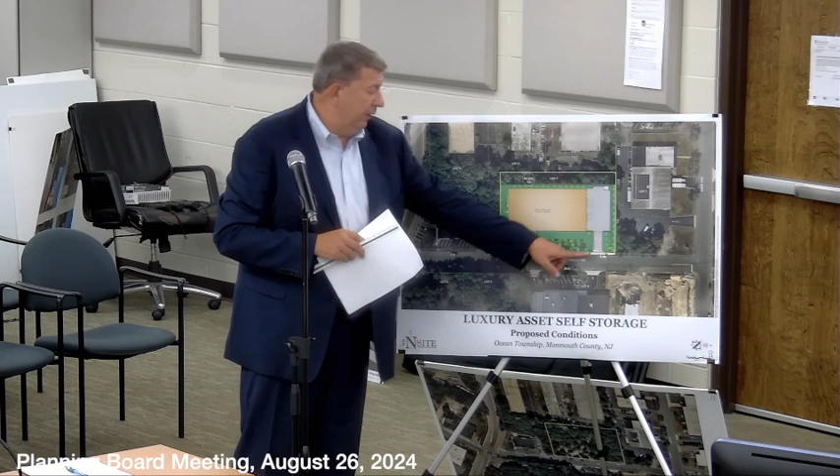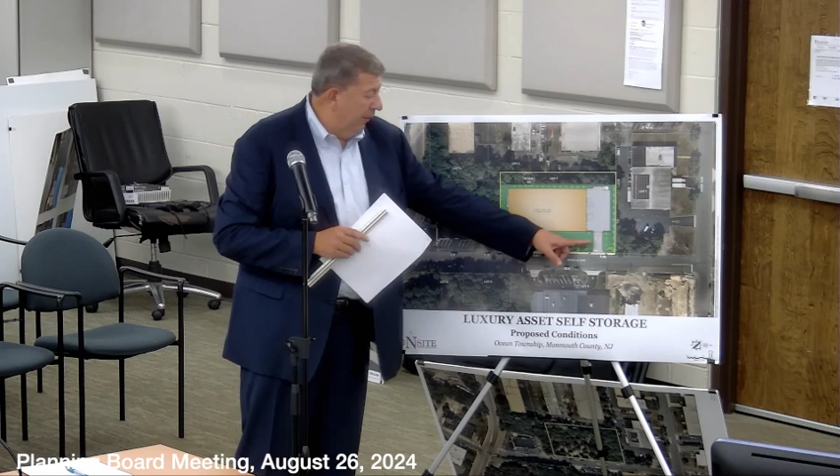And when you speak about buffer, there is no buffer requirement because it's industrial against industrial. And behind us is really just the sides of those buildings, which is either just parking or access ways around those buildings, and those are also in the I-1 zone, correct? Correct. These are existing industrial buildings, and you can see there's parking right along the rear common property line that we have. And then what we're proposing is for access, a 24-foot drive aisle that'll lead you to a 19-space parking lot with ADA spaces as well as an EV space. That's going to allow you to have access to the doors, both pedestrian and vehicle,

to have access into the building. Your zoning requirements require one parking space for every 50 storage units. Here we have 16 storage units, so we're required one space, so we're exceeding that by providing 19 spaces, which is greater than one per unit that we have. With the parking spaces, we are proposing to utilize 9 by 18 stalls versus 10 by 18, which is required by your ordinance. So we are requesting a variance to allow a smaller stall by 1 foot. And that's really based upon the low turnover of this kind of use. And by decreasing that stall space, it does allow us to decrease the impervious coverage for the site as well.

I'm sorry, that's a requirement for a luxury asset or for? No. The parking requirement for self-storage is one space per 50 units. Your parking stall width generally across the board in the township is 10 foot wide. As this board knows, typically a variance would be granted as long as it's not a shopping center with shopping carts and a high turnover location. Based upon this type of use, loading typically would be done with vans or potentially a box truck. So we haven't designated a separate independent loading area for this facility based upon the number of units only being 16. So we are requesting a variance not to have a designated loading area.

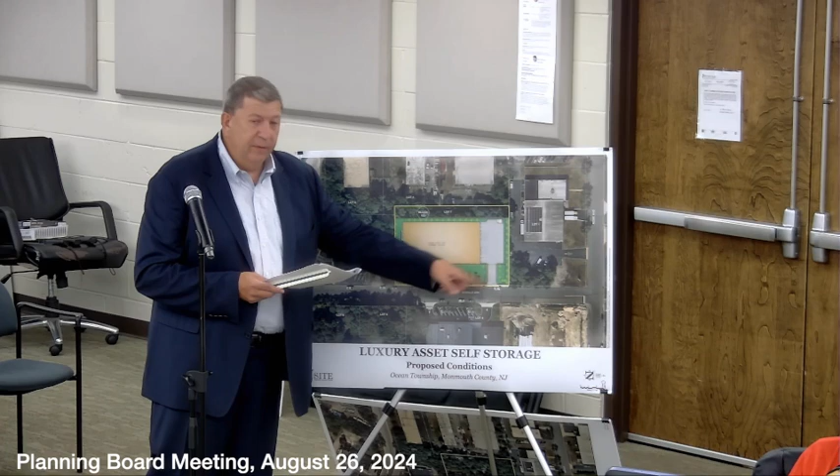The ordinance requires a minimum of 10-foot deep landscaping along the side and rear property lines. We far exceed it along the rear, greater than 30 foot where 10 is required. On the northern side, we're at 7 feet, where 10 foot is required per the ordinance. The 7 foot distance is the same distance that was previously approved.

When you look at sort of the average of it, it would average greater than 10 feet for the side and the rear. And then on the opposite side, on the southern side rear area, we greatly exceed the 10 foot of plantings in that area. So it's in this one area along the north that we're 3 feet below the requirement.

Landscaping along public streets. So when we did this plan, we really tried to add a lot of landscape plantings right along the frontage and tried to enhance that as much as possible. Your ordinance envisions 10 foot of sod or grass between the property line before any planting and shrubs occur. So here we're less than 10 feet. We have mostly plantings and things of that nature.

What we proposed there, we would look at possibly pulling back some of the shrubs. The idea, through the planner's letter, is to provide more area for snow storage. So that's why they want to have a buffer a little bit beyond the sidewalks. So I do believe we could pull back some of the shrubs, still maintain that dense planting, and still provide a little bit more room for snow storage in the future. As well, if there was damage to the shrubs, the owner would replace and take care of them as needed.

And Eric, just to understand, so we're still asking for the variance. We are. But we're willing to work with Jim to manipulate that in order to create sufficient snow storage to meet the intent of the ordinance. Okay, yeah. That's my intention.

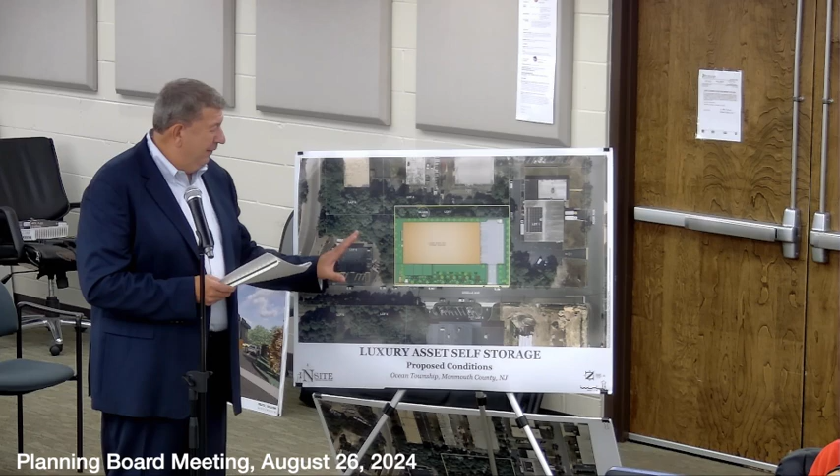Best for last, proposed grading. So again, earlier we talked about the 28 foot of grade change. Non-residential buildings like commercial and industrial really always have a flat floor plate, so you have to have that at one elevation, whereas we have a site with 28 feet of grade change. So to accommodate that, we set the building so the southern side is actually acting as a retaining wall, and on the northern side, providing appropriate slopes to have access to the driveway. So we tried to fit the building into the hill to take up some of the grade change.

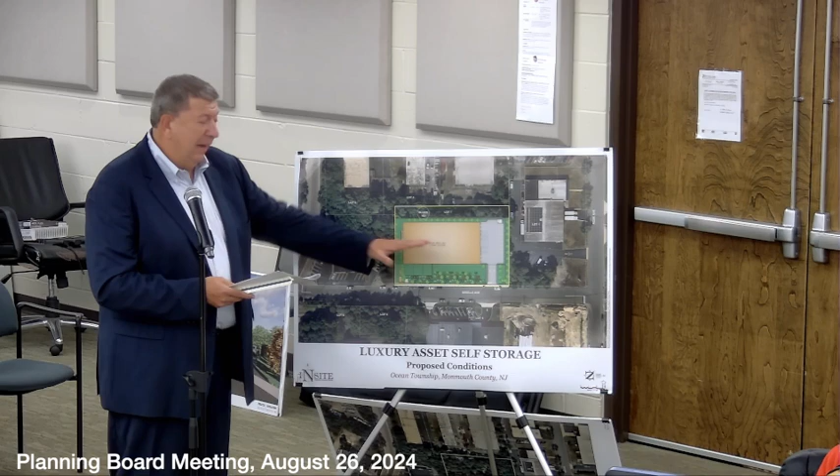This resulted in maximum cuts of 11 feet and maximum fills of 12 feet, so we tried to balance that. With that said, your ordinance only allows a maximum of 2 foot of grade change. For a site with such great topography of 28 feet, there's virtually no design that could comply with only a 2 foot grade change. But we do feel by building this into the embankment of the hill, we were able to balance the cut fill requirements.

Eric, as it relates to that addition to the ordinance, I've heard Jim say many times over the years that it was really put in to, one, help regulate single-family homeowners so they weren't raising and building their homes on hills, and to make sure that it's not really against changes of grade, it's against a change of grade that's going to have a negative impact on any of the surrounding neighbors.

So from an engineering perspective, while we need the variance because in order to properly develop this property we have to change the grade, are we addressing any of the potential drainage issues that would typically be associated with a change of grade like this? Meaning, are we creating any issue or are we addressing it all? We're addressing all stormwater requirements. There are comments within the engineering review letter, but overall we'll address those comments so we'll have a fully functioning system.

But in your opinion, from an engineering perspective, there's no negative impact to the surrounding neighbors relative to stormwater through this change of grade? Correct. This will be fully stabilized once it's constructed. Okay. What is the change of grade?

So the change of grade is, there's a maximum of 11 foot of cut. Meaning, in layman's sense, you're taking it down 11 feet in some areas. Correct, which would be on the southern side. And then on the northern side, there's a maximum of 12 feet of fill. So we're essentially balancing the site. We're talking about a 23-foot difference. Yeah, we are. With that 28 number, that's where we're at.

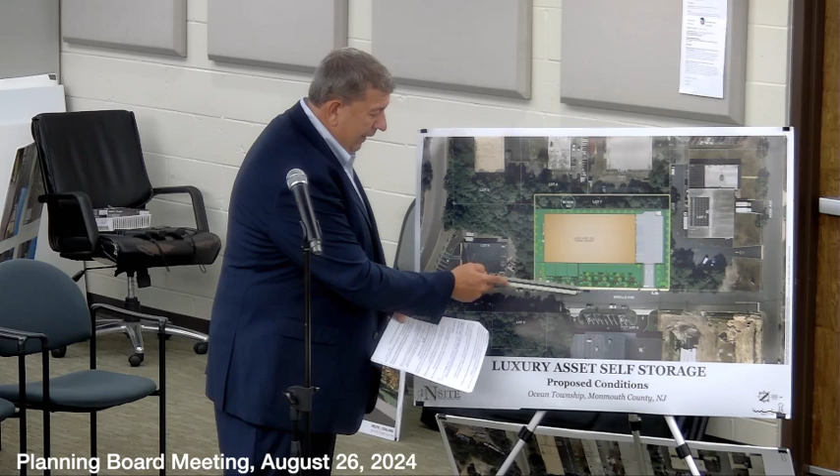So wall number 1 ranges in height with a combined 6-foot fence and wall. I'm going to give you the combined heights because of how your ordinance is written. The combined height allowed for a front yard is 4 feet; side and rear is 8 feet. It ranges from 7 feet on the southern side, which is the high side, to the worst case scenario, which you'll see an arrow in this area right here. That's where it goes to 11 feet. So at the worst case scenario, you would see a 5-foot retaining wall with a 6-foot fence above it, to get 11 total.

Now the 6-foot fence that we're proposing is not a solid fence, it's a decorative aluminum Jerith fence that's open. Correct, and that's one of the better upgrades for this plan. The previous plan was approved with chain link fence. Now we're using decorative aluminum Jerith fence per the recommendations of your professionals. And the wall and fence, based on the dense plantings, as you can see in the rendering, really won't be visible from the street, but technically it's a variance. As it relates to visible impact, it's not a solid wall and a solid fence, it's just a wall with a decorative fence on top.

Correct. So for wall 1, we have 20 feet of setback and plantings to buffer that. How high is the landscaping in front of that? So it's going to be 3.5-inch trees that will be branched up to the appropriate heights, and then we have the shrubs. The shrubs, yeah, I'm thinking of the shrubs, because the trees aren't going to screen it, but the shrubs will, and I'm trying to recall what variety it is.

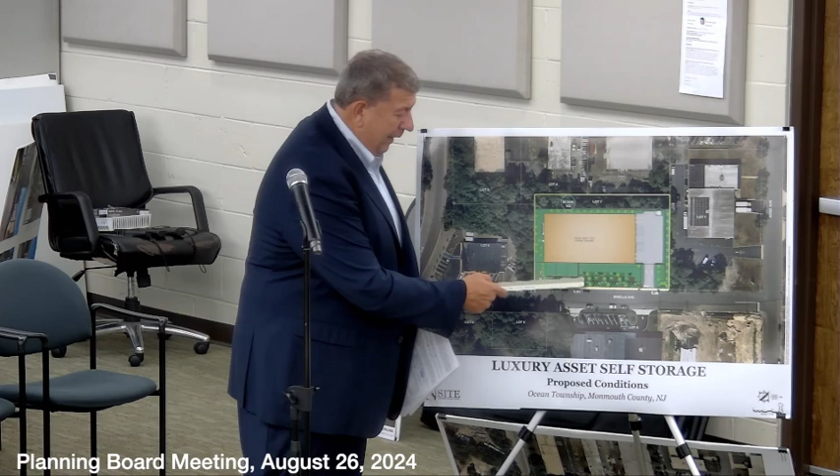All right, so that's retaining wall 1. There's 4 total walls. So then retaining wall 2, that is an L-shaped wall that actually is around the bioretention basin, which is actually recessed. So the bottom of the retention basin is actually below Brielle Avenue. So the grades inside this area of the basin are lower than Brielle Avenue.

So from the exterior, what you would see from Brielle Avenue looking in, it would range from 6 feet, which is the fence height, to 7.5 feet. So there's not much retaining wall, only a maximum of 1.5 feet, that you would actually see along Brielle Avenue. But Eric, I want to just clarify. We're not proposing the fence on top of the wall, correct? We're proposing it in front of the wall. Correct. And the max height of the solid wall is 1.5 feet. Correct. Okay, so we're talking about a 1.5 foot wall behind a decorative fence.

Correct. So when you're saying 7.5 feet, I went to so much trouble to explain the location of it because it's not 7.5 feet. It's just a technical way that this ordinance is interpreted. Well, actually, if that's the case, then I don't think a variance is necessary there, because the highest vertical element is going to be the fence at 6 feet. Correct. And if the wall is behind it and starts at the same elevation basically as the fence, the combined height is still 6 feet. It does.

Okay, fine. But it's still in the front yard, so a variance is necessary. Correct, so we still need the variance for the 6-foot decorative fence, but again, for notice purposes, we always do it in the most conservative way possible and err on the side of safety.

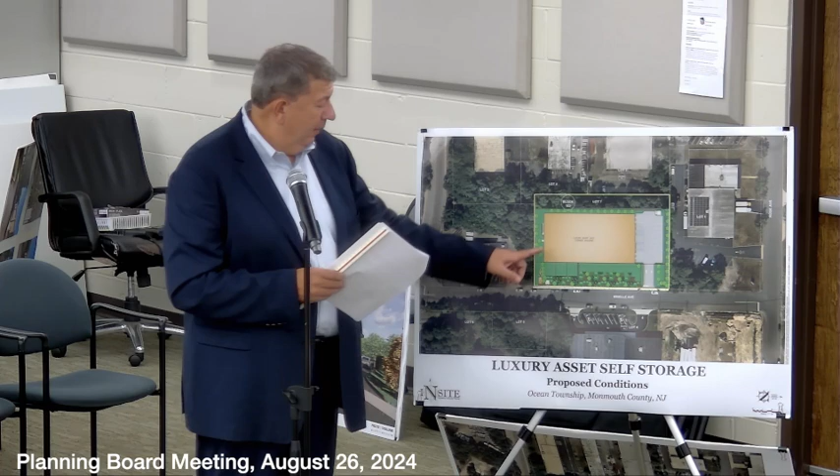If you're standing looking from the southern property line, all you're really going to see there basically is a 6-foot fence. So it's basically from inside the stairwell at the bottom is where you'll see the wall. That's correct. Okay, and I just wanted to put on the record, just so the board is aware, under the prior approval, the fence wall height in the front yard approved was 13 feet, so we're actually improving that. And the fence wall height in the side and rear yards was previously approved at 20 feet, so we're actually improving that as well. So I just wanted to note that for the record.

So we are trying to make it better through this redesign. It's just, we have the hardship of a topographically challenging site. So that's how we accommodated the building. So the different elevations of the building, the different retaining walls, and the buffering, that's how we address the grade changes.

Stormwater management, so we do need to address water quality, runoff reductions, groundwater recharge. So we're addressing that with a bioretention basin. This was similar technology that was proposed previously. It meets the latest NJDEP green infrastructure requirements. There are comments within the engineering review letter, but I know that we can address all of those.

For water, we are proposing a water service off the existing main within Brielle Ave. This is New Jersey American Water Company territory, so we have the meter pit, which is flush to grade, but then we have the above grade backflow preventer that we have set back about 24 feet. The backflow preventers have to be above grade, so we have that set back as much as we could there.

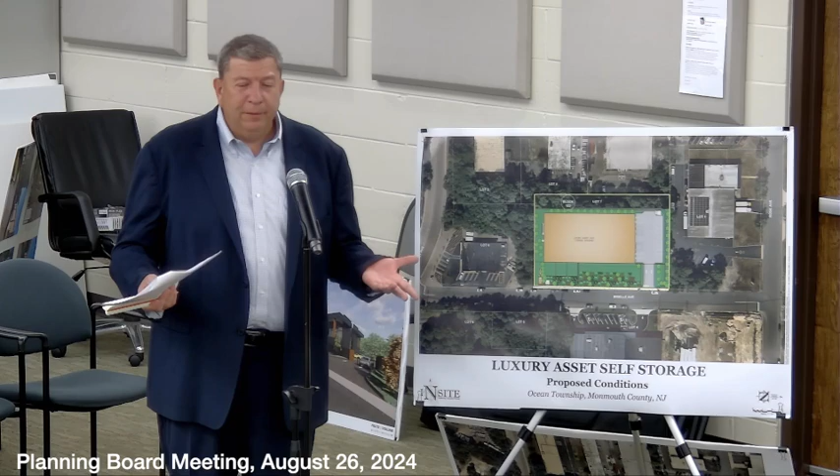And staying on that same theme, because of the location requirements, we also have a transformer adjacent to Brielle Avenue for the electric company to have access. So we also have that in the front based upon their requirements. And then we have sanitary sewer connecting up to Brielle Ave. You know, self-storage really doesn't generate a lot of sanitary sewer, but we have that ability.

Okay. Before I open up the questions here, I just want to ask you guys, because there's a lot to digest here. How are you feeling about the structure here? Are there things that you're having questions about, things you're not comfortable with, things we want to talk about? I think they've answered most of my concerns. I think it's a much better application than the one that's approved. Okay, well, when you say most, are there other concerns that you have that haven't been answered?

But I don't think any questions I had haven't been answered. I think they've all been answered. And Mr. Chair, just so you know, we did meet in concept with Ben and Jim before we filed the application to make sure that we were going in the right direction and addressing their concerns before coming in, recognizing how difficult this site was. So I don't know if you guys knew that. I just wanted you to know that we did avail ourselves of that ahead of time. Okay, good. So, Ben, do you have anything?

Yeah, I have a couple of things. First one is pretty minor. One of my comments in the lighting section was about a light along that southern entrance by the stairwell. I don't think there was one on the plan. Can there be like a building mounted sconce or something? We definitely have emergency light there. Definitely. Okay.

And then the main thing is regarding stormwater management. The regulations that were passed in 2023 require planning for future rainfall events to the 2050 and 2100, and it requires basically a factor of safety with regard to the rainfall intensity, and implementing that may result in modifications to the stormwater management system. Is that going to require like enlarging the basin or anything like that? I think we had some buffer in the design, so I don't anticipate anything substantial to address the stormwater comments. Okay.

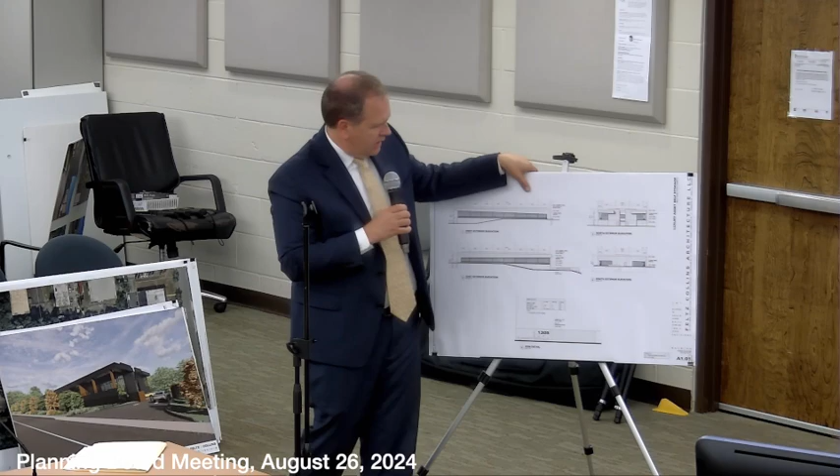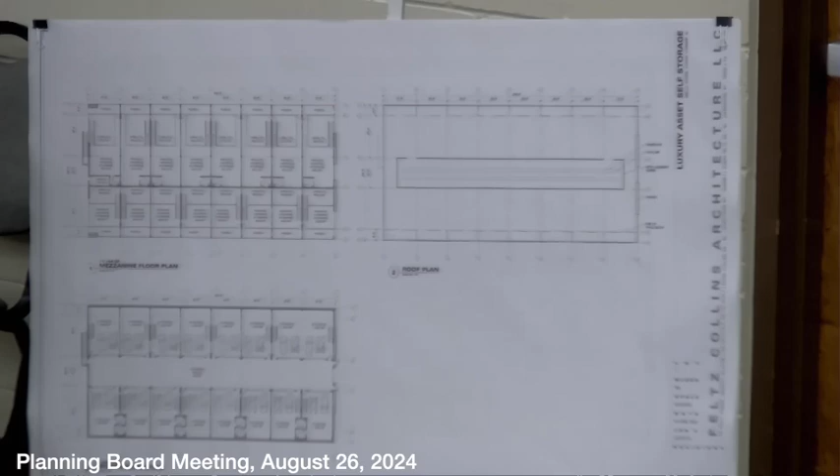So again, staying on A4, these are the floor plans that were part of your package, A201. Starting at the bottom left, drawing number 3 is the ground floor level. So when we say ground floor, you may consider it the basement really; it's cut into the hill. On the right side of this plan, you'll see an overhead door entrance and a couple of exit doors. And down through the center of the building, there's a drive aisle.

This allows cars to drive into the building and into any of those units, whether it's for loading or for storing. From the parking lot, which is in this area, you drive down, you can go into your unit, and then obviously you can back out and exit. This drive aisle is designed just like a parking lot drive aisle. It's 24 feet wide, the same width for two-way traffic.

And there are only 16 units here, so this is not going to be heavily trafficked, but it is wide enough to negotiate cars in and out through this main aisleway. On the lower level, there are again 8 units facing Brielle Avenue and 8 units facing the back of the site. There are no windows in this area because we're kind of underground this whole area.

And that is the reason we needed this exterior stairwell that's down in the ground, so that if there's ever an emergency, anyone on this level can exit out through the north side of the site to the parking lot, or to the south side up the stairs to grade and then exit safely to the street. So this was one of the wall conditions, but the reality is that's just a hole in the ground with a set of stairs that go down to that basement level.

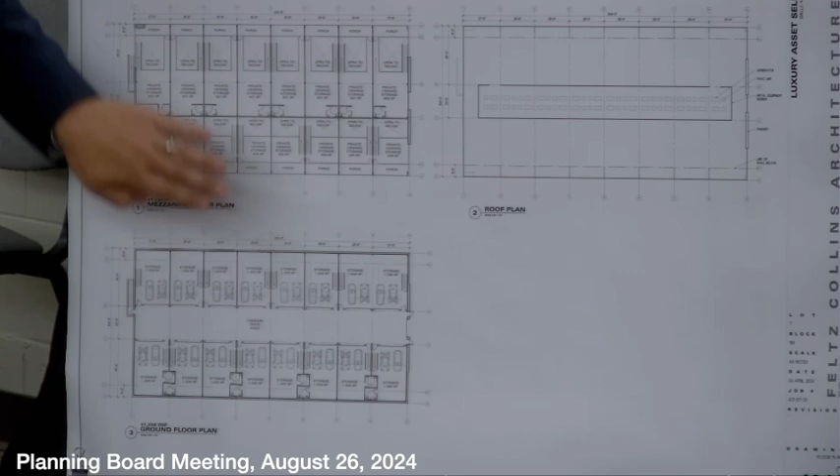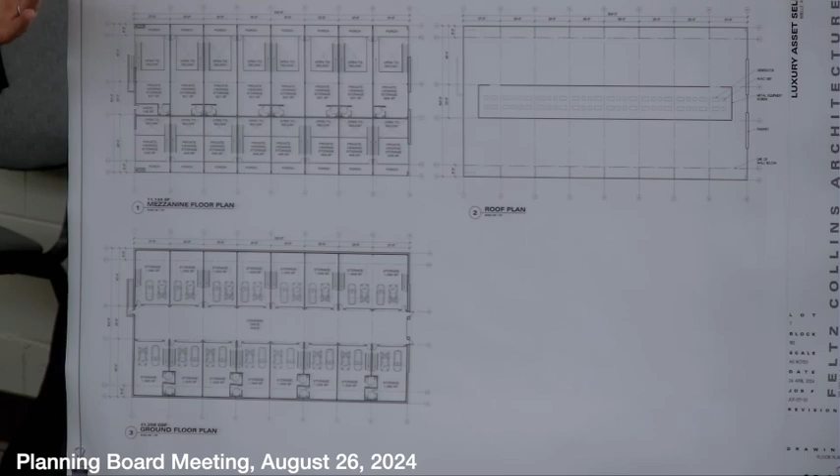The level above that, which we call the mezzanine level, is again divided 8 units towards Brielle Avenue, 8 units towards the back of the site. So each unit is 2 stories, whether in the back or the front. Once you get inside your unit, you have a staircase up to this mezzanine loft area. In all of these units there is a double height space. So it's not 2 full floor plates; it's a full floor plate on the ground floor and a partial floor plate on the upper floor, and you can look down in your unit to the lower level.

So if we just take a random unit, you can come in the garage door or the man door. There's a bathroom on the lower level. You can go up the stairs. When you come up, you have the private viewing area here, and you have a porch in the front. And the same thing in the back units. You can come up the stairs. In these ones, we actually put the floor plate over the drive aisle, so the opening is more towards the exterior, but we also have a walkway to a porch on the back side.

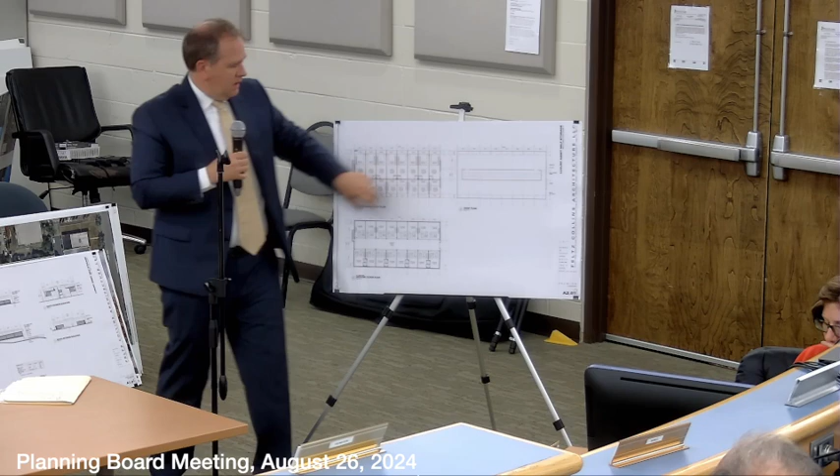The last drawing is drawing number 2, the roof plan. We are going to be solar ready, so we're going to design the building to take the additional weight of solar panels, so those can be installed at any time. And we consolidated in the center of the building a farm for all of the mechanical equipment. Each of these units is going to have a condensing unit and a generator, so each unit can function independently and be climate controlled to whatever the person wants, separate from everybody else.

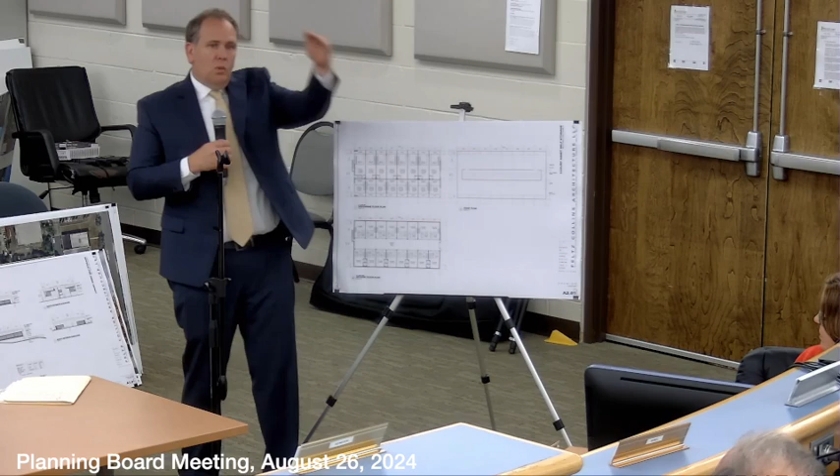And we have the rooftop screen that goes around the entire farm, and there's a couple entrances for servicing that face towards the back. We face them towards the back because of the extreme topography dropping off in the back. There is no possible way you could see up over the profile of the roof onto this roof. In fact, even from the highest part of Brielle Avenue, you probably won't even see the equipment screen because of the way the roof plane projects forward. It's going to block your line of sight.

This is a rendered view, which is it, 9? 10. A10. So this is exhibit A10. So this is a rendered view. Obviously, if you're standing in Brielle Avenue on the northern part of the site where the entrance is to the parking area, this is where this view is taken from.

And so what we're trying to show here is the actual view of what you'll see from the street. And if we were to have taken this further up the hill, it would be even more buffered. We took it from kind of the most open piece of the site. So up here, you're not really going to see much. You're going to see a lot of landscaping.

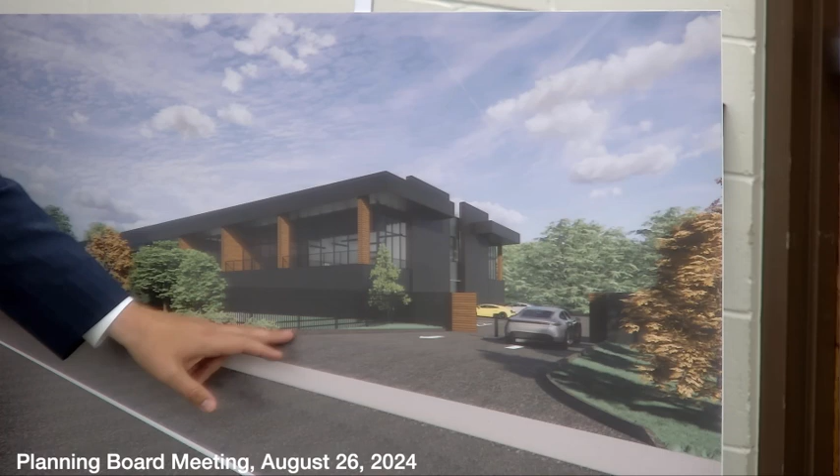But as an example, you can see a little peek of light color here behind this fence, and that's actually the bottom part of the retaining wall that is behind that fence. So you do get a little peekaboo here, but this fence wraps around to the front. This area is the basin that drops down into a hole. So way back in there is that tall wall we're talking about that's kind of holding back the earth so we can store the stormwater on the site.

And because that's vegetated even on the inside of that wall, it's going to be nearly impossible to ever see that wall. Even if you were down a little further to the north, it'd be very, very difficult to see into that area. So for the architecture, we wanted a really kind of crisp, modern building. We don't have any signage except for the emergency numbers. This is really kind of just a low key place for 16 people to go and store their things. It's not intended to be overly flashy. That's why we use darker colors on it.

But we did kind of create a rhythm across the front, and we created these porches so that we had a little bit of depth in the facade. It wasn't just a big kind of warehouse box. We wanted to have some visual interest along the front, and also gave a nice place for people, if they're viewing their assets inside, they can step outside and kind of get some fresh air and enjoy that. So we have a wood effect on these columns to separate these. Glass storefront that wraps across the front and wraps around the corner. The roof plane slopes up and cantilevers out to really kind of express that horizontal.

And then inside this wall and gate is the entrance to the garage door, and we kind of express that as a drop down area. We brought these two pieces up and dropped this down, and then now we're to the back units, which are pretty much the same as the front units. You have some of the wood effect and the glass and the porches, to try to create some relief along that facade. And as it relates to those 3 lawn areas, what was the idea behind that? Okay.

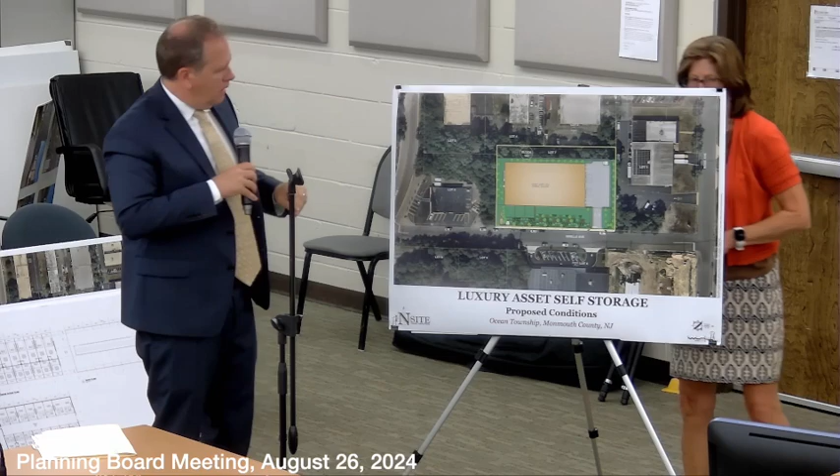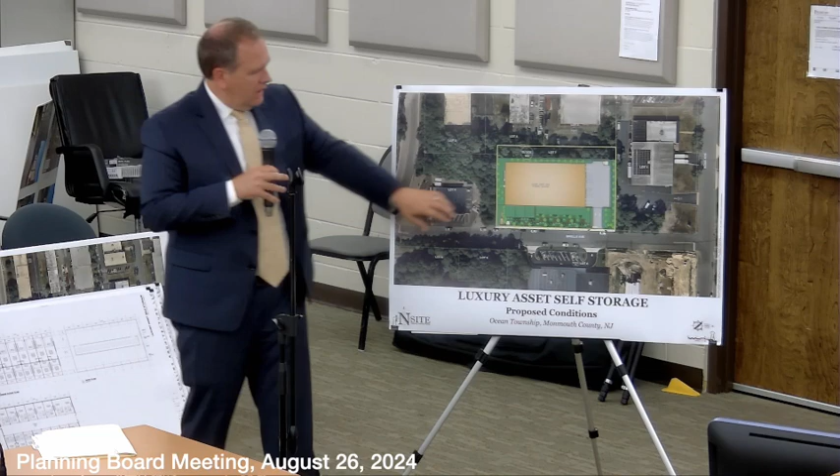Okay. So the idea of these 3 areas is that they could become gardens. So we're trying to create some variation in the unit. So there are some units that are corner units that are more attractive than an interior unit. And so we had the opportunity, since the grade was high here, to retain this a little bit and create an area where you can spill out from your patio or porch onto this garden area, whether it's grass or planted out. It could be kind of a private area that's not seen from the street, that these 3 units on this southeast corner of the building could have private access to.

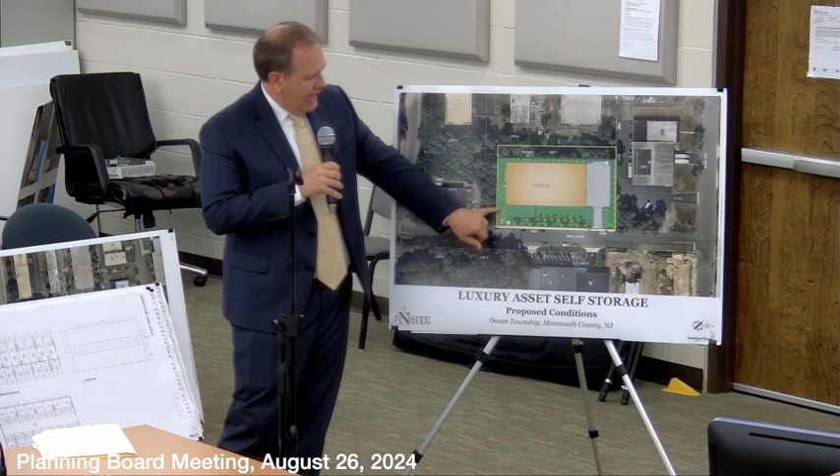And so it would be maintained from either inside the building or access from the north side. Right, a series of gates are required, and you can access that at grade from this area straight into each of those for any kind of maintenance. If you have to pull something out or mow or whatever, you could get through that way. And again, this is really just to set an ambiance because of this luxury level asset. So when people walk in, it gives them this feeling that they're in someplace other than an industrial storage unit. Exactly.

Okay. So I have a question. Are those bathrooms inside the units? Yes, each unit has a bathroom. This is a hell of a club. I don't know where you guys get asset self-storage from. Porches, gardens. Like, who's going to monitor the fact that this doesn't turn into a club?

Yeah, well, that was going to be my next question off of that, just from a legal perspective. Are we having events in? No. I have my art collection. I want to show it off to my friends. Do I have them all over and have hors d'oeuvres, and I have my bathroom there? The guy next to you's got all the wine, apparently. I'm just trying to see what this is becoming, because I've never heard of a self-storage place with a bathroom per unit. I understand it's luxury, but this is almost porch, and gardens.

So if I may, Mark, it's kind of a new thing. They have this thing, garage condos, where they sell them. Each one has a bathroom, maybe a bar, maybe a pool table. These will be sold. These are all going to be privately owned. Okay, so it is exactly like I thought. So it's a new thing. It's been out a couple years. You can go on YouTube and see them. They're beautiful. The principal in the applicant entity is here to talk about the concept. It just would have been impossible to discuss the concept without you understanding the site and the building first.